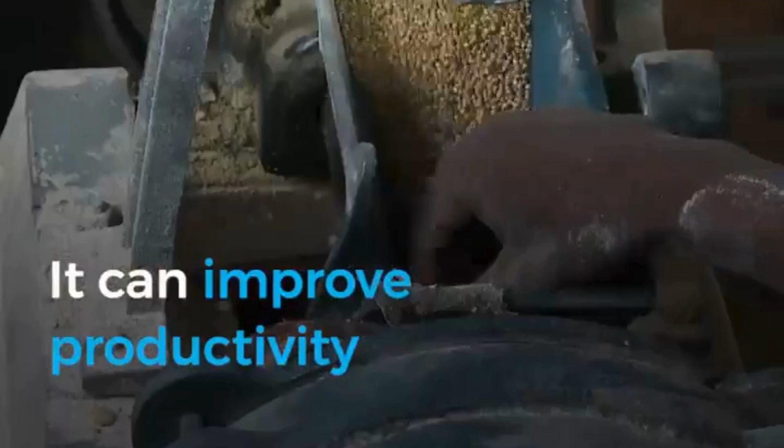These unstable climate conditions negatively impact crop yields, reduce the nutritional quality of crops, disrupt supply chains, and threaten food security. Reducing food loss and waste plays a key role in transforming agri-food systems. It can improve productivity and ensure natural resources are used more efficiently, contributing to economic growth and benefiting society as a whole.

What if the solution to energy and environmental challenges was already in our hands, hidden in the waste we throw away every day? Today, we present a smarter, sustainable approach, which is converting the organic waste into a green energy.

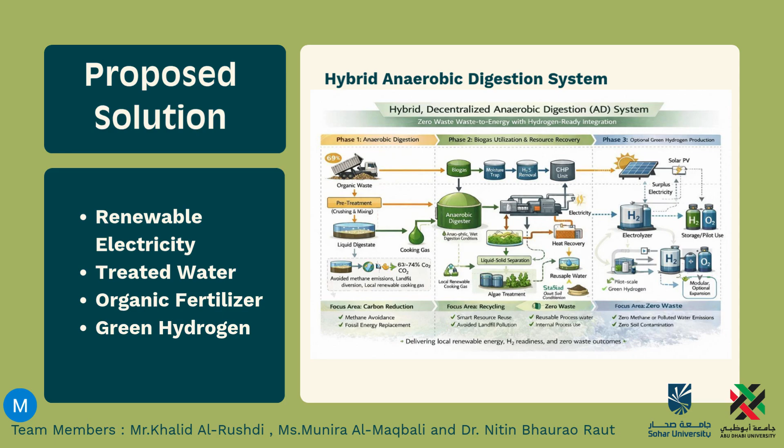Assalamu alaikum, myself Khalid al-Rushdi. I'm Munira al-Maqbali. Today we would like to present an ideal solution, which is a hybrid anaerobic digestion system, which solves a significant issue facing whole countries, especially the GCC countries.

Do you know that, Munira, around 70% of waste in GCC countries is just organic waste? And this organic waste, what do you think they are doing right now with this waste? Maybe they are landfilling it. Exactly, landfill. So what's happening now here in GCC countries and also in Oman, is that this valuable source just goes to the landfill.

And how much does it cost per month? It's around 5 million Omani riyal. So imagine that instead of using this valuable source, we are just dumping it in the landfill, and it's a burden for the country.

Our agenda will be an introduction, then we will go deeply to the problem, then the waste analysis in Oman, then we will show deeply the proposed solution, and then we'll go also to explain it from the technical side and financial aspect, then we will conclude our presentation.

So moving to our solution, we have divided our solution into 3 phases to keep it in reality. Phase 1 is already in the ground, it's a learning platform. So what we have done, we have collected all the organic waste from Sohar University restaurant and nearby restaurants.

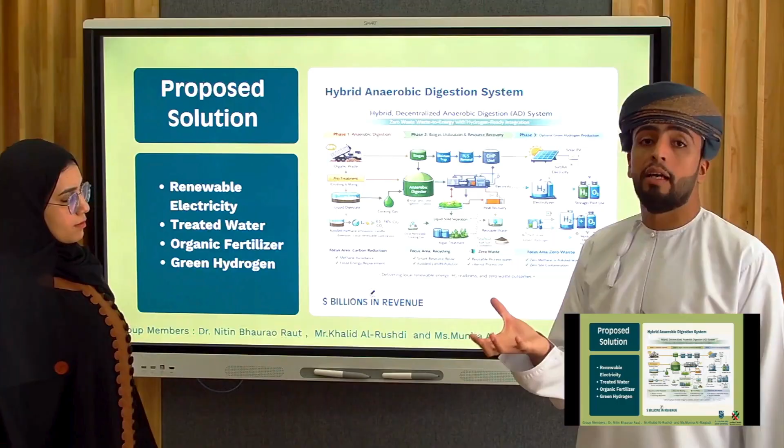And not to forget that we'll have the digestate. This digestate will go for treatment. We'll use some microalgae that can consume all the contaminants in the sludge, and then we'll have a separation unit that will produce a liquid that can be reused in the facilities, and then we'll have the digestate, which can be used as organic fertilizer that can be utilized in the country.

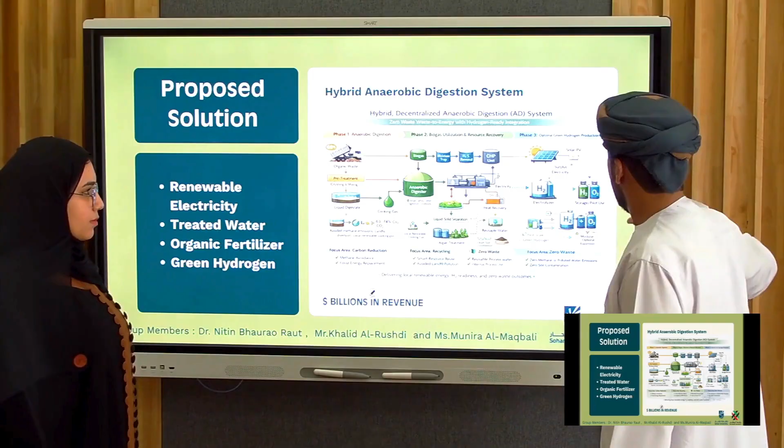So now let's move to the prototype that which is already in the ground with my colleague Munira. As Khalid mentioned before, the first stage is already implemented, and as diluted water, we are using two types of water. The first one is tap water, the second one is sewage water.

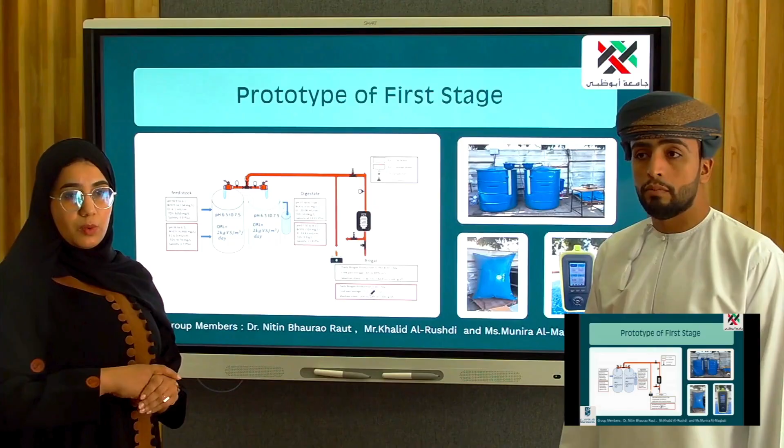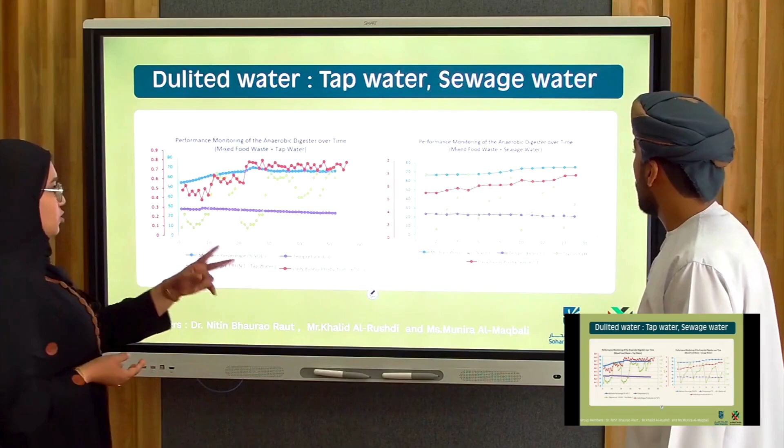When we are using the tap water, we reach methane percentage in a range of 65 to 70. While using sewage water, we reach more than this, reaching 74.8%. So when we are using sewage water, which is already an issue in wastewater management, we reach more concentration of methane. This chart shows that using tap water, it's only in a range between 65 to near 70, but by using sewage water, we reach 74.8.

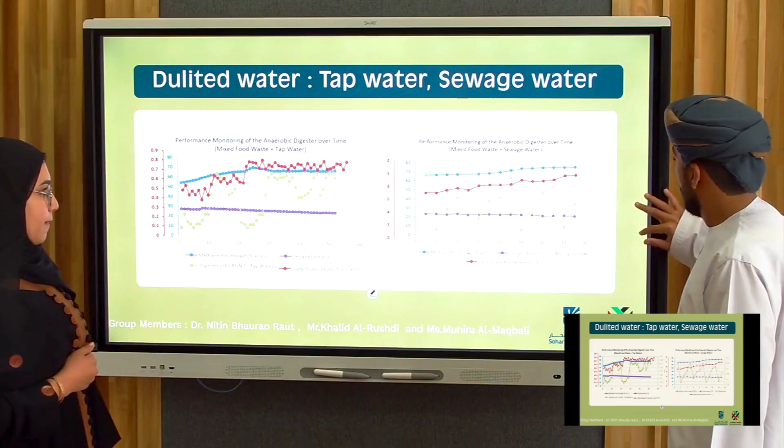Also the competitor analysis related to our idea: first is the green hydrogen production facilities. They are producing hydrogen depending on solar panels, which is environmental, but they are not reducing or doing anything related to organic waste. So by our idea we also try to reduce the organic load.

Also the waste collection system, like in Oman we have be'ah, they are collecting the waste and dumping it in the landfill, but this way has high emission of methane, and they are not recovering any value from this waste. Also some competitors use incineration of this waste to get steam, from which they run turbines to generate electricity, but this way produces more emission.

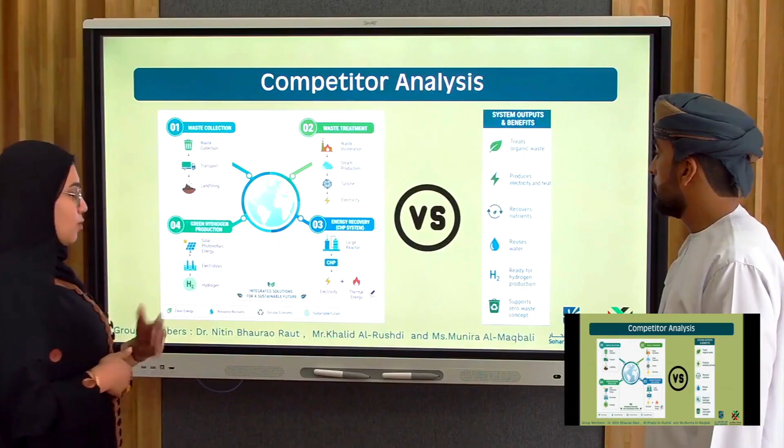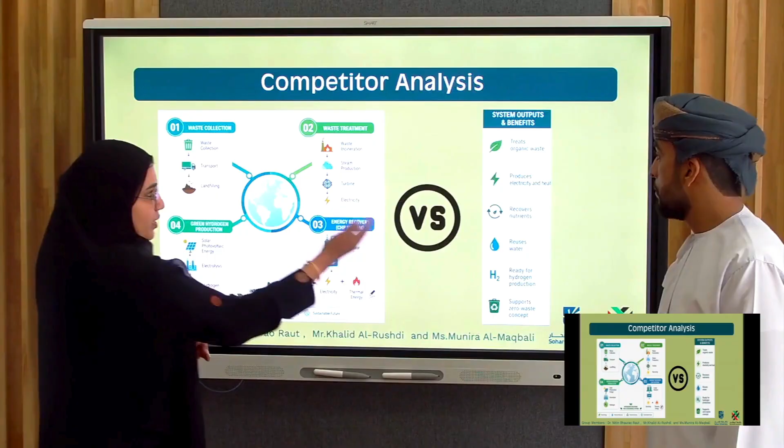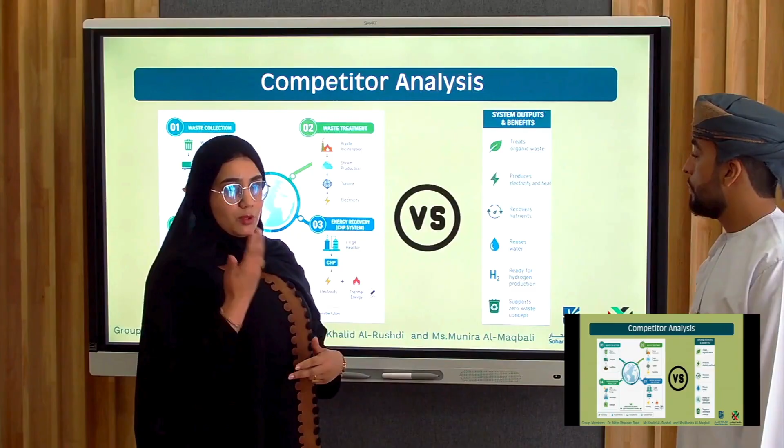Also energy recovery by combined heat and power systems also produce electricity, but they depend on large reactors and it is costly. When we compare these competitors to our idea, by our idea we treat the organic waste and also produce green electricity, and we can use the water coming out from the system, and as a future plan we can produce green hydrogen from the waste. So we are converting the organic waste which we throw daily into a valuable resource of energy.

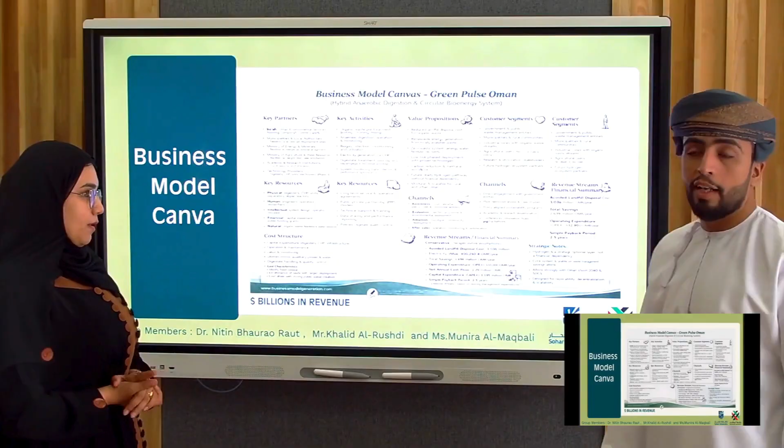So now moving to the financial aspect to make this project on the ground, to make it reality, not just theoretically on paper. So we have run a deep analysis, canvas model, and these are the outcomes we have obtained.

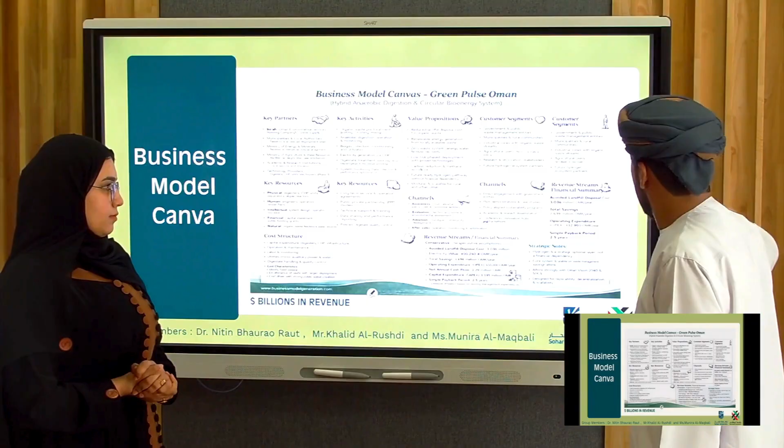So we have done a risk analysis, and it's not ideal, and it's not real that you take all the waste, for example in Oman. Because if you are just starting this system, you cannot take all the waste from Oman that can be treated. So what we have done, we have taken a portion and run the analysis. We see that when we get 0.25% of this waste treated with our system, we reach a payback period of 1.5 years.

And you can imagine this is only considering the avoided cost of landfill. We are not considering all other costs. If we consider all other costs, you can imagine how much more ideal our solution will be.

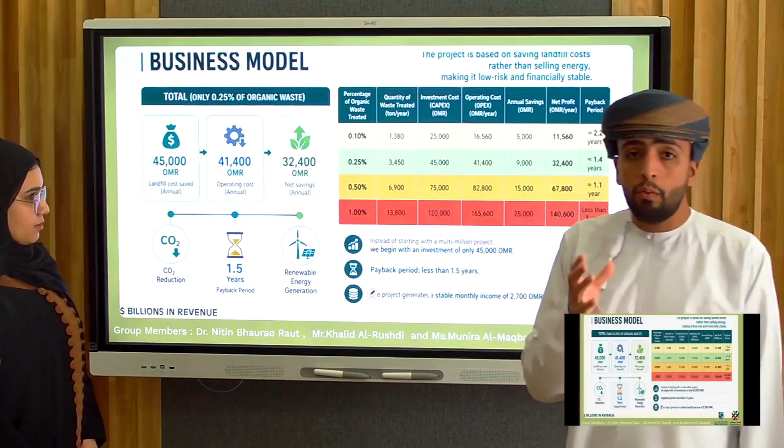So at the beginning, we can suggest that we have 45,000 Omani Riyal, which is the capex cost, and the payback period is 1.5 years, with net savings on an annual basis around 32,000 Omani Riyal.

So to conclude, from waste just going to a landfill to green hydrogen, yes, it looks very big, but if we go step by step in phases, we believe that we can reach this target. We are reducing the organic waste and methane emission, plus enhancing our income and saving money.